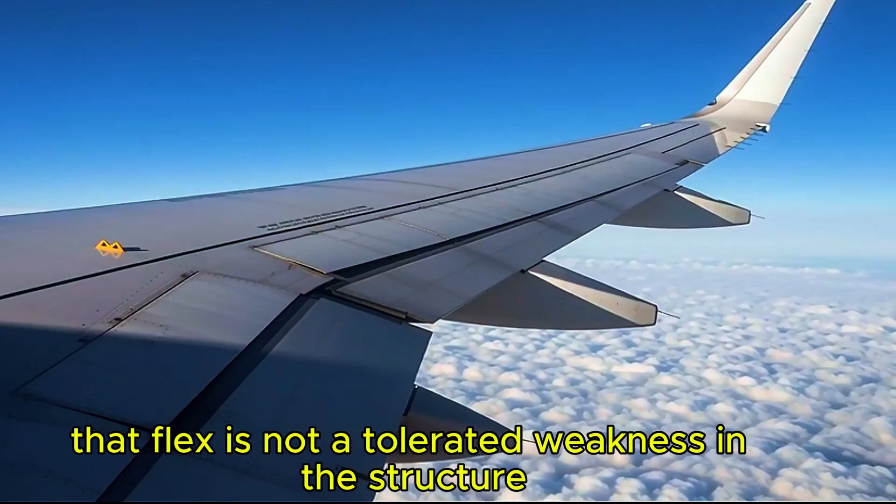But here's what most people don't realize: that flex is not a tolerated weakness in the structure. It is the structure. The wing is designed to bend, and if it couldn't, it would snap clean off.

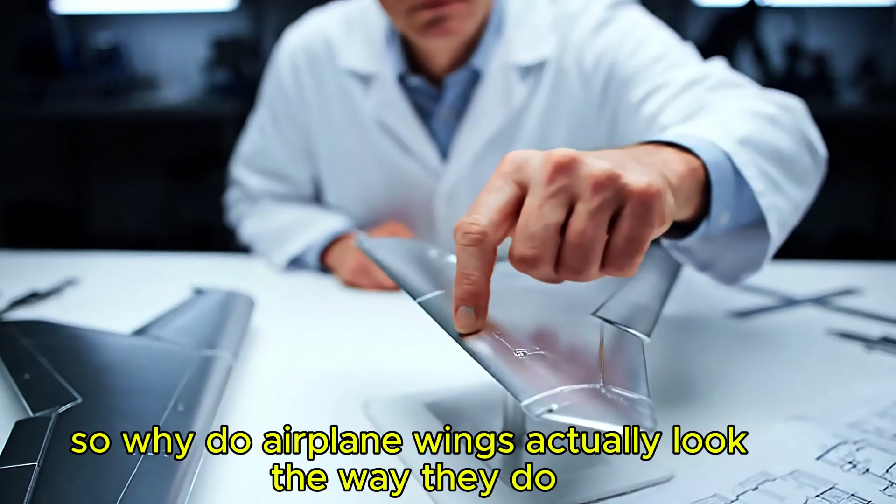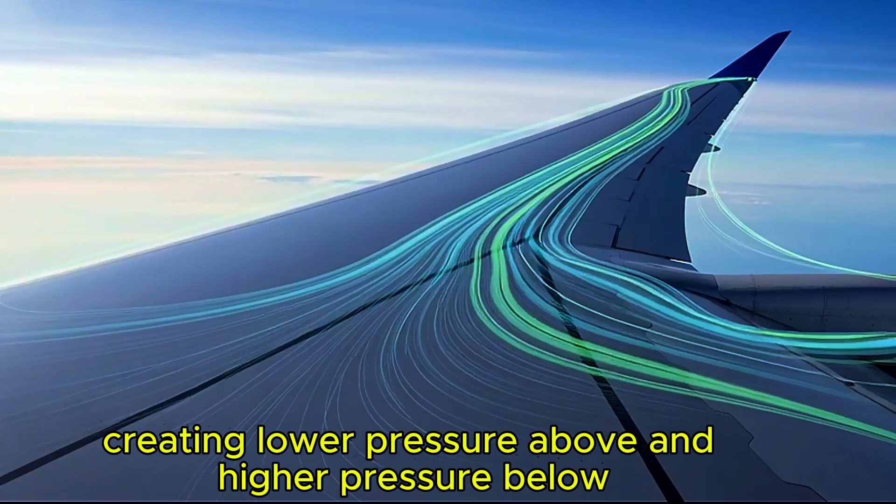So why do airplane wings actually look the way they do? Swept back, tapered, slightly twisted, and curved upward at the tips? The common explanation starts with lift. Air moves faster over the curved upper surface of the wing, creating lower pressure above and higher pressure below, and that pressure difference pushes the wing up.

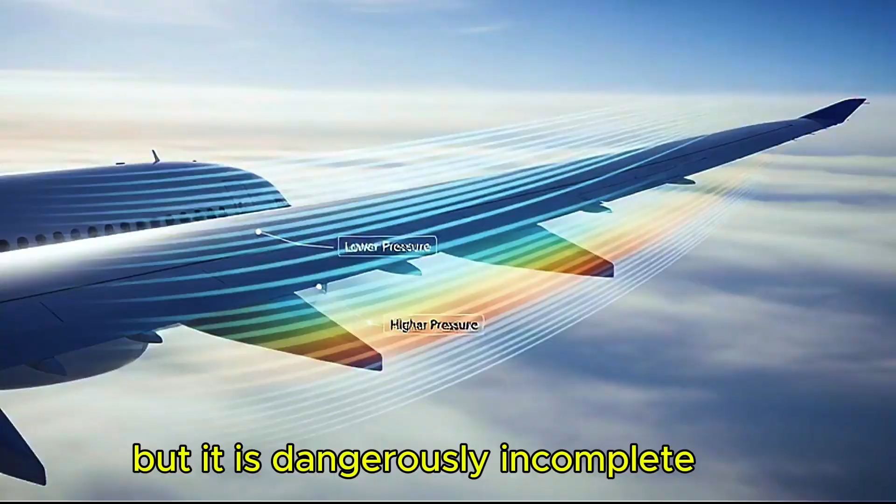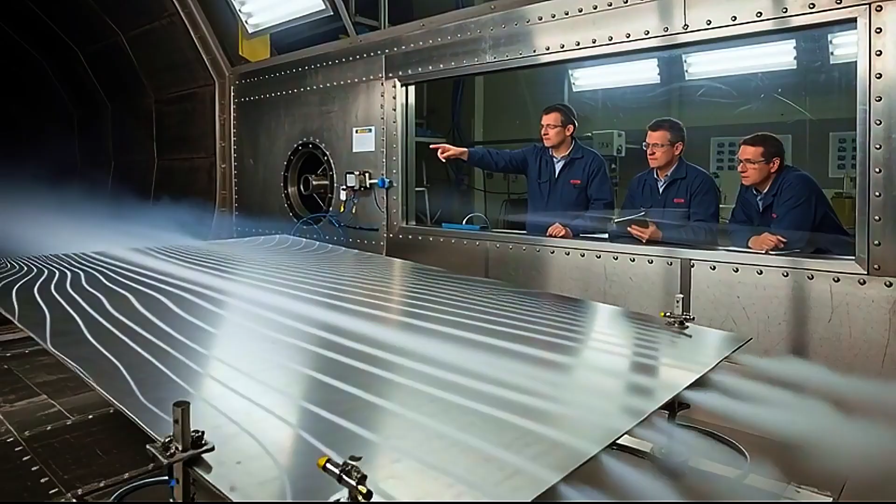That explanation is not wrong, but it is dangerously incomplete. Lift is easy. Any flat plate angled into a wind generates lift. A barn door generates lift. The real engineering challenge was never producing lift. It was producing lift without killing everyone on board.

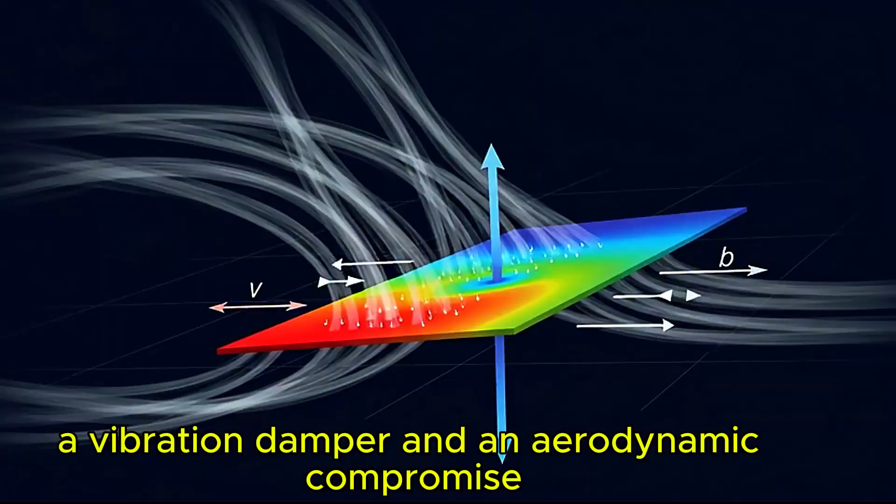The first thing to understand is that a wing is not just a lifting surface. It is a fuel tank, a structural beam, a vibration damper, and an aerodynamic compromise all built into a single shape. The swept-back angle most passengers associate with speed actually exists primarily to delay the onset of shock waves as the aircraft approaches the speed of sound.

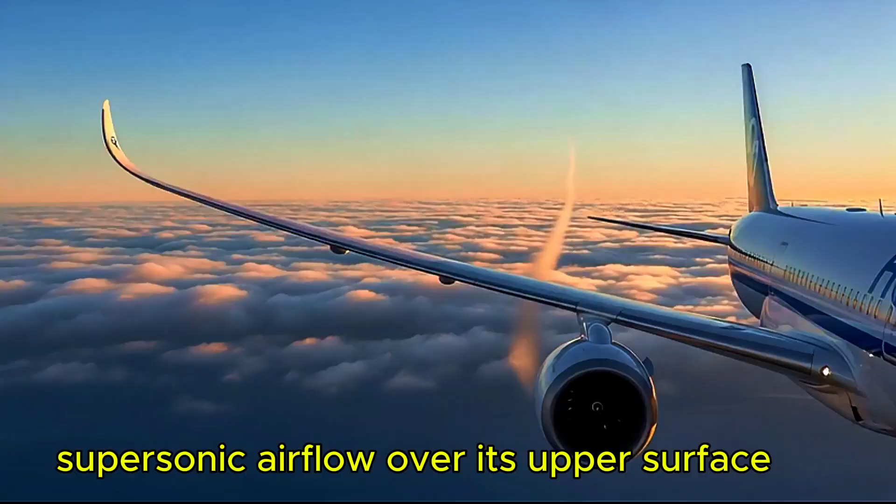A straight wing on a Boeing 737, cruising at around Mach 0.78, would begin forming localized supersonic airflow over its upper surface, producing drag that rises so violently engineers call it the drag divergence boundary. Sweeping the wing back 25 degrees effectively makes the wing see a slower airflow component perpendicular to its leading edge. Not a faster wing, but a wing that tricks the air into behaving as though the plane were slower.

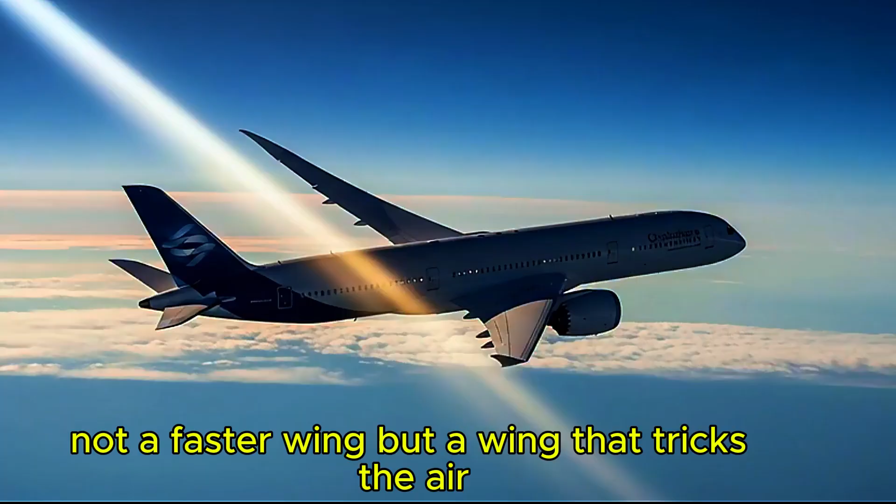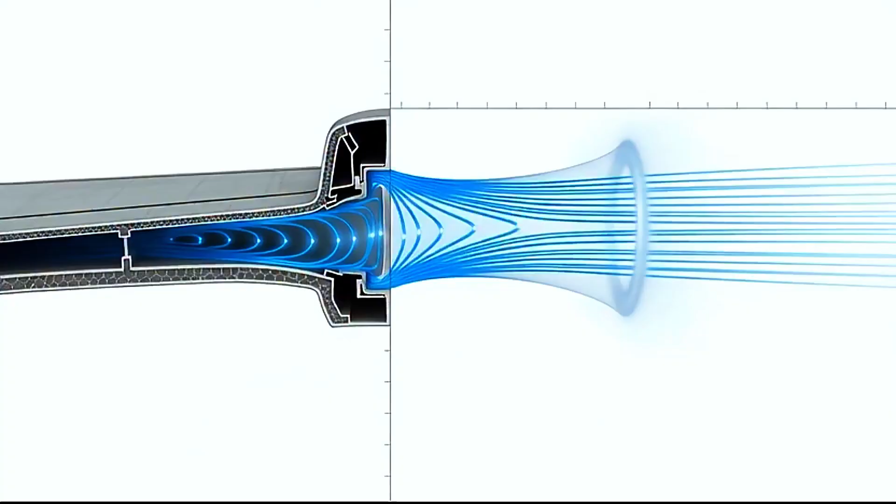But that raises another question: if sweep helps at high speed, why not sweep the wings even further? Because sweep carries a penalty. A highly swept wing produces less lift at low speed, which means higher takeoff and landing speeds, longer runways, and more dangerous approaches. The 35-degree sweep on a 777 is not an optimum, it is a negotiation between cruise efficiency and the reality that every flight must also slow down.

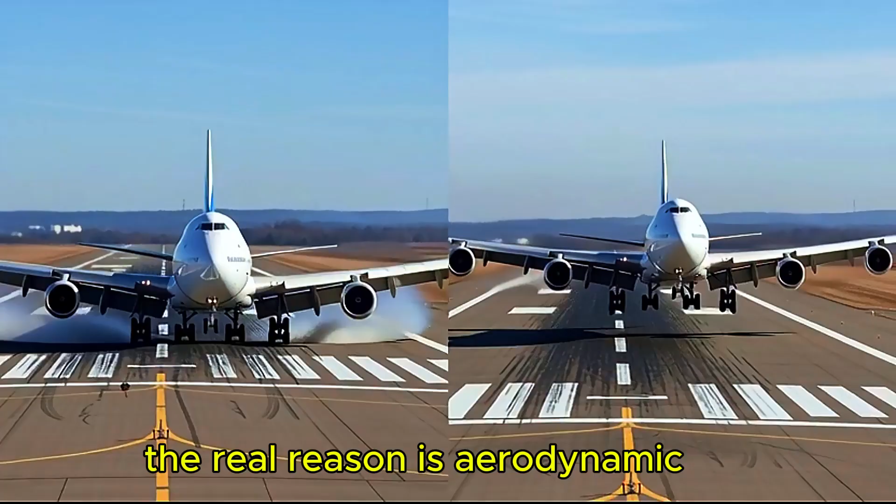Then there's the taper. Wings are wider at the root and narrower at the tip. Most people assume this saves material. The real reason is aerodynamic. A tapered wing distributes lift more efficiently along its span, approaching what engineers call an elliptical lift distribution, the shape that produces the least induced drag for a given amount of lift.

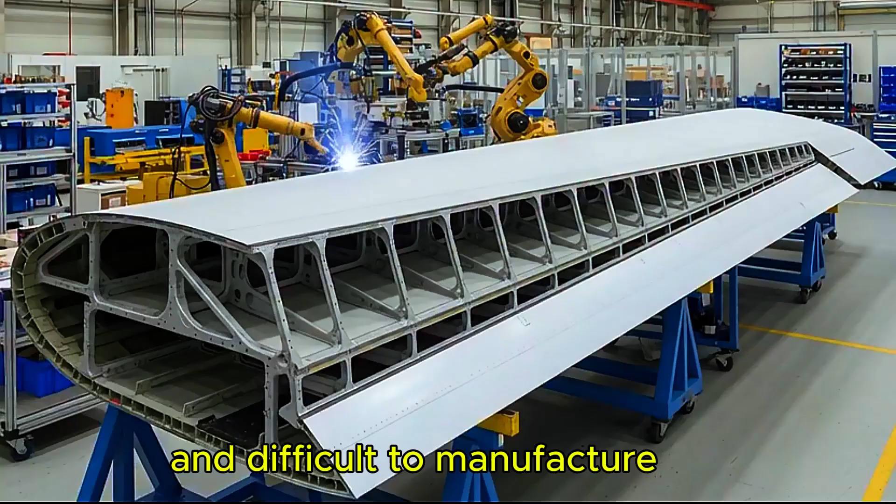The Spitfire's famous elliptical wing planform achieved this almost perfectly, but elliptical wings are expensive and difficult to manufacture. A simple straight taper gets roughly 95% of the benefit at a fraction of the production cost.

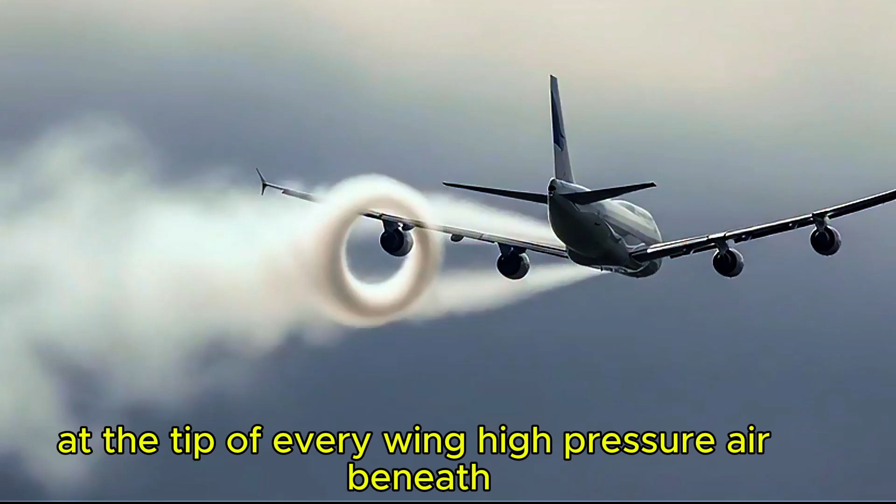Not elegance, but economics. And those curved-up wingtips, winglets, are solving yet another problem. At the tip of every wing, high-pressure air beneath curls upward and around to the low-pressure region above, creating powerful vortices that trail behind the aircraft. These wingtip vortices represent wasted energy, and they are strong enough to flip a small aircraft that flies through them.

A winglet acts as a vertical barrier, weakening that curl. Modern blended winglets on a 737 reduce fuel burn by roughly 4 to 5%. That translates to hundreds of thousands of dollars saved per aircraft per year.

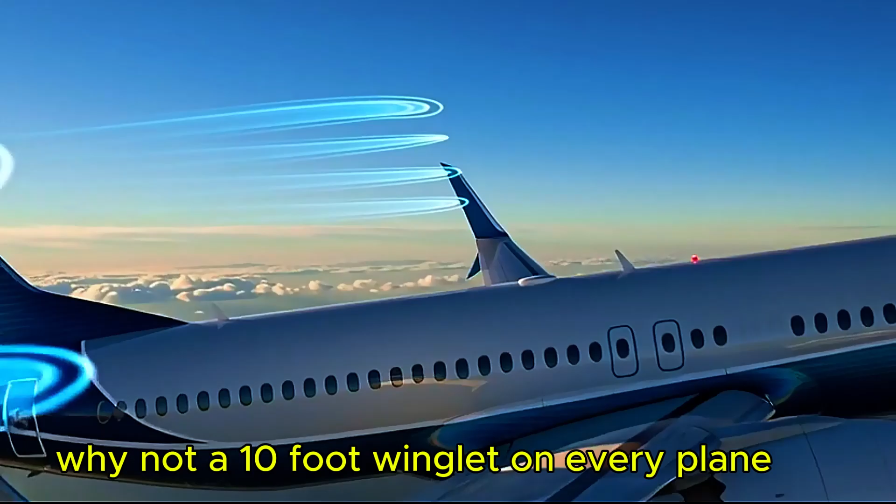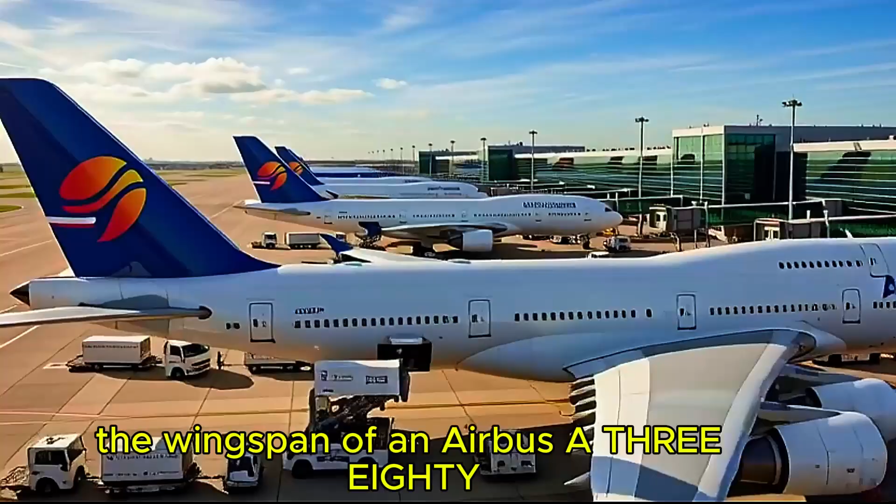But if winglets help, why not make them enormous? Why not a 10-foot winglet on every plane? Because the answer is not just aerodynamics, it is gate space. Airport terminals are built to fixed widths. The wingspan of an Airbus A380 already pushes the 80-meter box limit at most international gates. Every inch of winglet added to the span is an inch that must be accommodated on the ground.

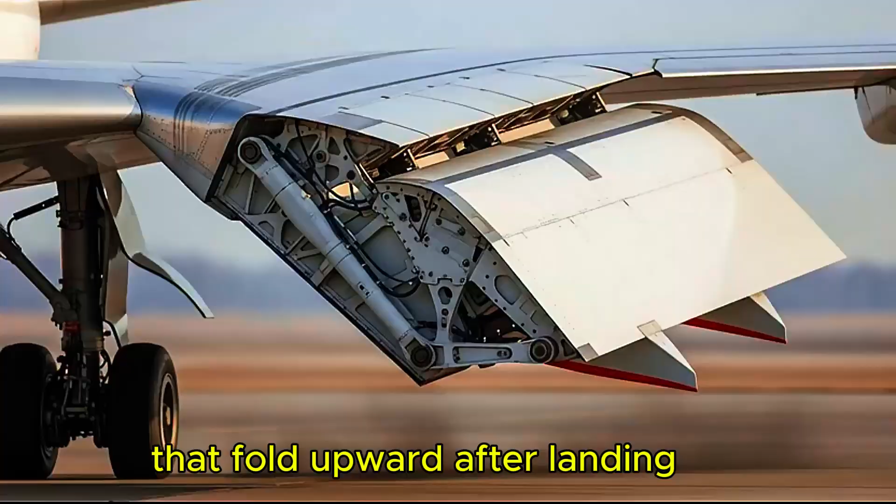The folding wingtips on the Boeing 777X, hinged panels that fold upward after landing, exist not because of any aerodynamic need during flight, but because the wing is too efficient to fit at a standard gate. Not a flight problem, but an infrastructure compromise.

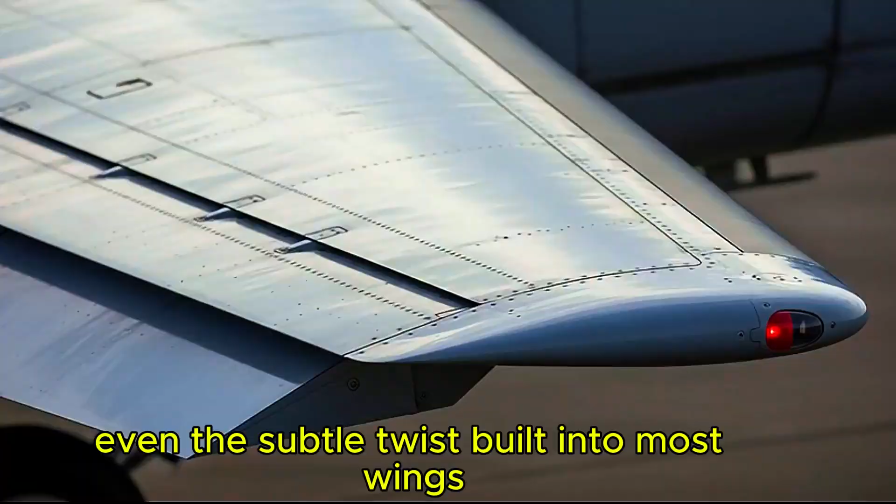Even the subtle twist built into most wings, called washout, where the tip is angled a few degrees lower than the root, exists to ensure that during a stall, the root section loses lift first while the ailerons near the tip remain effective. The wing is designed to fail partially and predictably rather than all at once.

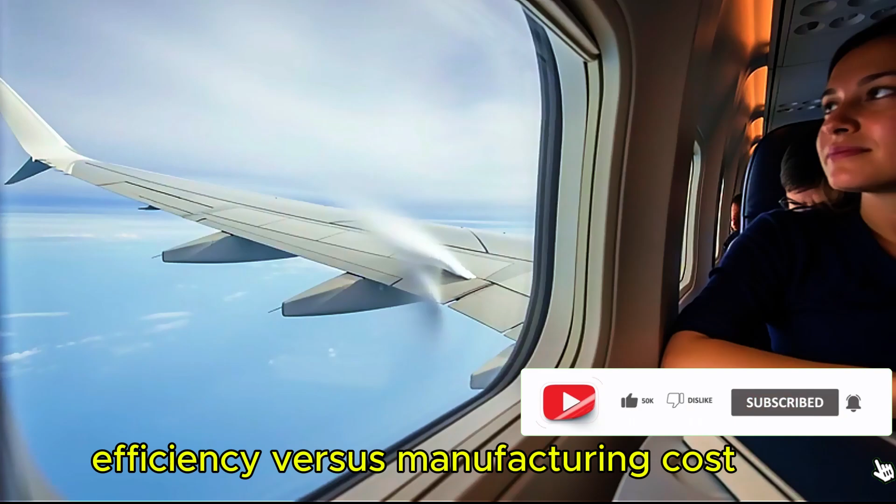To me, that is what makes a wing worth looking at more carefully. It is not a single answer to a single question. It is an accumulation of competing constraints: speed versus safety, efficiency versus manufacturing cost, aerodynamics versus airport infrastructure, each one resolved not by genius invention but by disciplined compromise. Not intuition, but decades of hard trade-offs frozen into aluminum and composite.

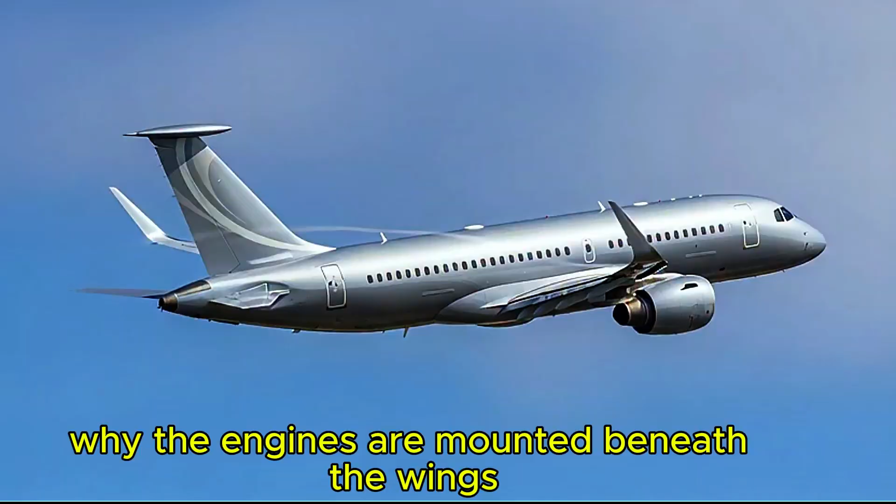Have you ever wondered why the engines are mounted beneath the wings rather than above them, even though that would keep them further from the ground?